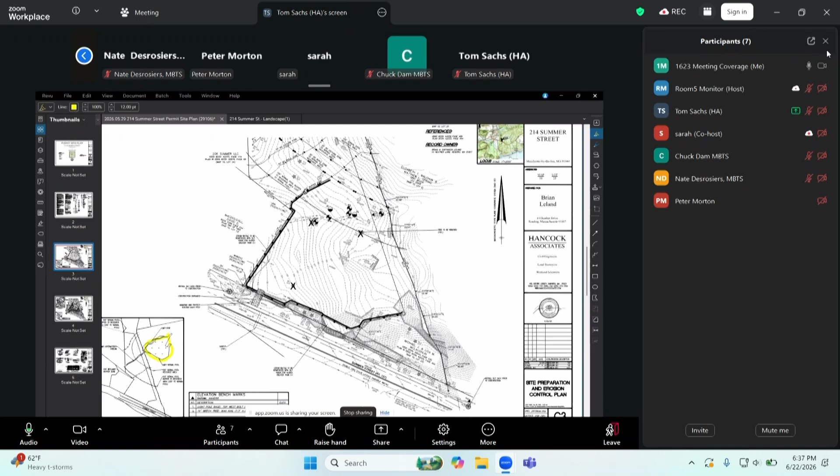Could you point out that 200-foot line? I don't think your pointer was... try to speed it up, show it. If it goes blank, let me know. There we go. Oh, there you go. So our 200-foot vernal pool buffer... I don't think your cursor is showing, oh we yeah, see it. It's like a delay.

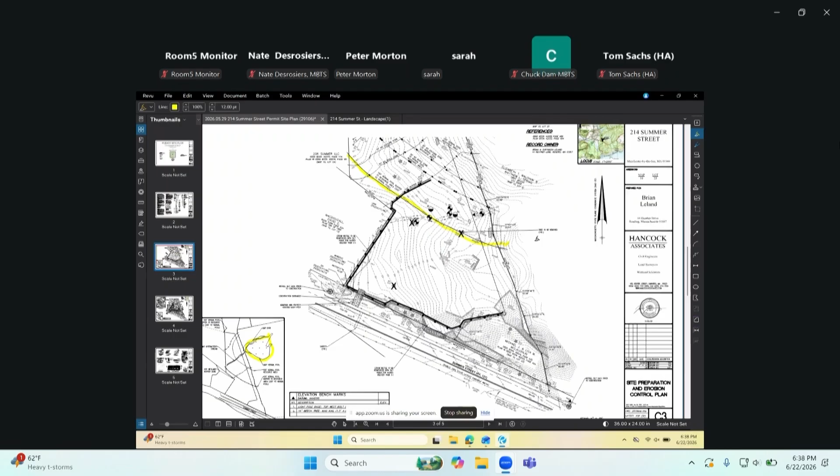So as I mentioned, we did build our site around the septic area. The septic area did require fill, so we do have a retaining wall in the rear of the yard.

Once we had our septic sized and located, we decided to move forward with the site design, which is our driveway. The driveway was designed working with the fire department. They have specific slopes and lengths we need to meet. If we exceed about 150 feet, we need a turnaround. That's why we have this larger driveway at the top, so the truck can pull in and back into that crushed stone area, then go back down the driveway. It's just for emergency access. It's not ideal, but we do need fire department access to the site.

Other improvements we're proposing are permeable pavers at the parking court. We weren't able to do permeable pavers down the driveway because of the steepness, you can't exceed 5%.

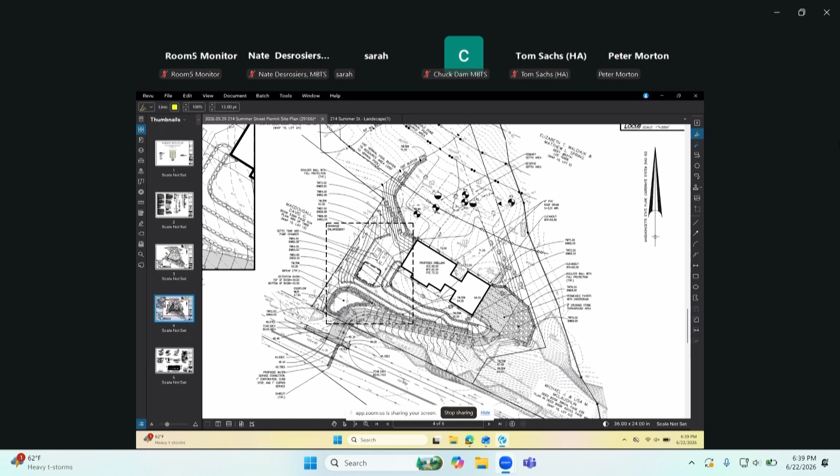For the dwelling itself, all the roof runoff is captured and infiltrated in a subsurface chamber system. I'll get to that in a bit, but that's this little box here. And then we have an enlargement here, so you can see our subsurface chambers adjacent to our septic. This area, we decided it would be best because of the ledge to build up this area. It would allow us to keep material on site, and also allow us to have separation of groundwater so we can meet the Mass Stormwater Handbook standards for 2 feet separation.

Other drainage improvements: because of the ledge, we really weren't figuring we'd get any infiltration at the bottom of the driveway, so we have a small detention pond there. It's not a lot of volume, only about 2 feet deep, nothing crazy. Our goal is to see once we start excavating or removing ledge if this area has soils or not. We can plant it, and our goal is eventually to treat it as a normal detention basin.

Other things along the driveway, we have crushed stone. We are worried about some erosion problems as water pitches into the driveway and into the detention basin. Sometimes those things can get washed away, so we wanted more of that.

Lastly, we are going through the stormwater management permit with the Department of Public Works. We did a drainage study. The hill goes much further past our property, and all of the water drains across our property in the east-west direction, draining into the abutting lot and into Summer Street.

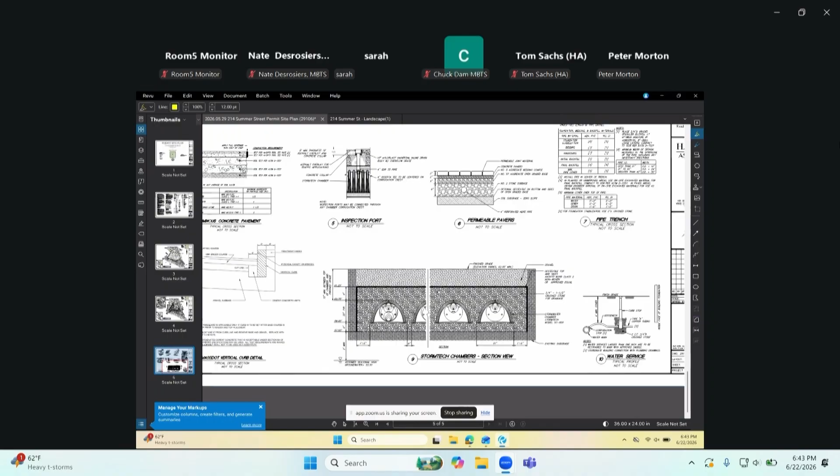And this is just kind of a cross section of the chambers. They're just standard StormTech chambers, plastic, 30 inches tall. Nothing really crazy, it's just there for our recharge purposes. And like I said, all the water off the roof is considered clean, so we're just recharging all the water from the roof right into those chambers.

All right, and you have good soils under those? Yes, well, we're filling up the whole system. The soils that we found when we were there were loamy sands, which is a higher textural class. And then we cross-referenced it with NRCS Web Soil Survey, and it said it was the same. The only concern for us was the ledge, so that's why we're building up this system. We can bring in or move around better material and put it underneath there.

And then I did do a quick little cut fill analysis. Our cut fill, I think, I'm just spitballing, I think it was around 260 cubic yards of cut, which I was a little surprised because I was figuring we were going to be shipping off a lot more material.

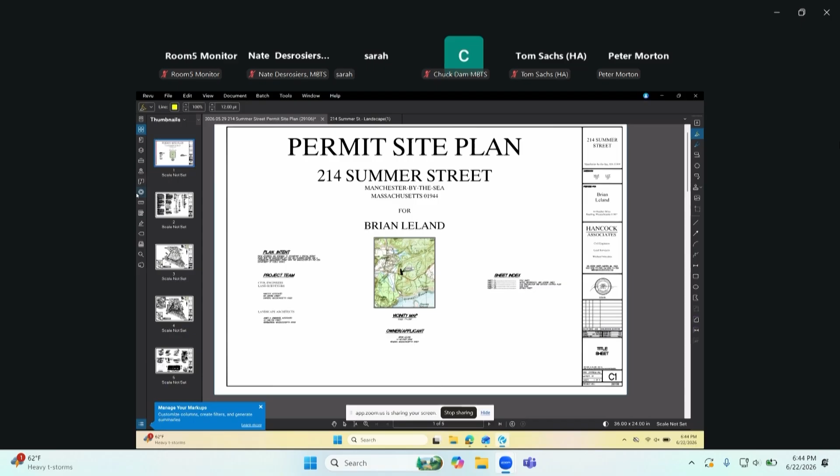And when we discussed the project with the board during our site walk, I forget who it was, I think it was you, you suggested that we do boulder walls, and we think that's a great idea. So we definitely listened to the board with that. We created this tiered boulder wall system, so that will kind of be more aesthetically pleasing from the road. We're using material on site, it's not going anywhere, and it kind of keeps with the look.

Our big concern when we were developing this lot is the board would really want to know how it looks from the street. I've had other projects where that's been a major factor. We find that if we're traveling towards Gloucester, that's your vantage point right into the property. You see right up the driveway, and you see into the detention pond. So those are things that I worked with James at James Emmanuel to provide a landscape plan for. Our goal is to hide those things, because going the other way, you won't see anything, the ledge is all going to be there, it's going to be planted, there's trees there anyway, as there is now. That was kind of our concerns, and that's what we got a lot from our site walk, it was very beneficial to us.

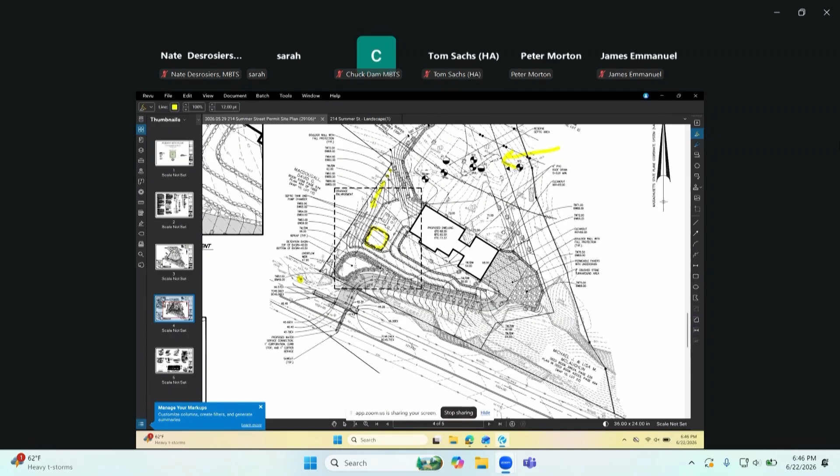Okay, you want to just walk us through the landscape plan?

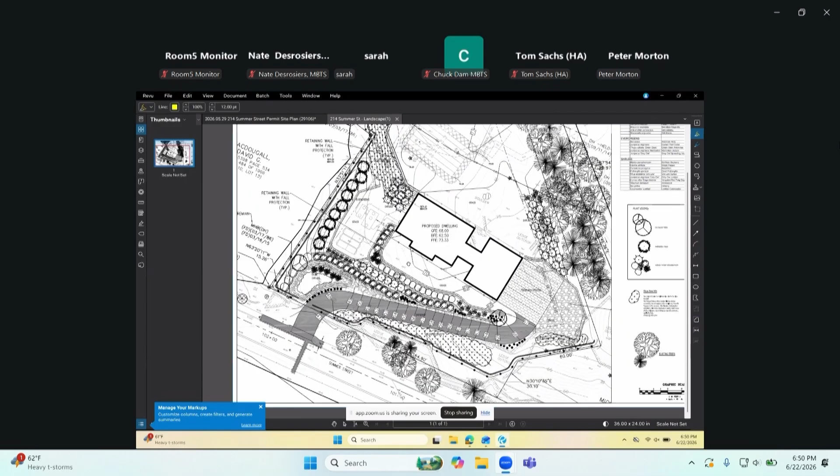When we get to the permeable pavers, you can see in back of that there's a planting bed. We would vegetate that entirety, going around the backyard where the septic leaching field is — that's all cleared out as a flat lawn space associated with the property. But going back downhill, we would revegetate that, and at its steepest point there's a wall, then the same kind of meadow seed mix along with some other shrubs with fibrous root systems that would stabilize that embankment.

So what we really want is to not look at bare slopes in any way. We don't want to see the structure of the terraces, just vegetation — kind of grassy, meadowy hills. We've got a few trees where we can, and we're looking to buffer with evergreens along the adjacent property while maintaining the drainage swales to preserve the grading and stormwater management developed in the civil plan. So that's the landscape plan — I can answer any questions on that.

So I have a question. Can you describe the vegetation that you'd be putting into those ledges going up to the house?

Yeah, so I'm looking at a palette of shrubs that are native, and we've got a mix of things like bayberry, clethra, sweet fern, fothergilla, viburnum, inkberry, red twig dogwood. So it's a pretty good native mix of stuff that's fairly tough, that will spread, and the root growth kind of suckers a little bit too, so they kind of really grab hold.

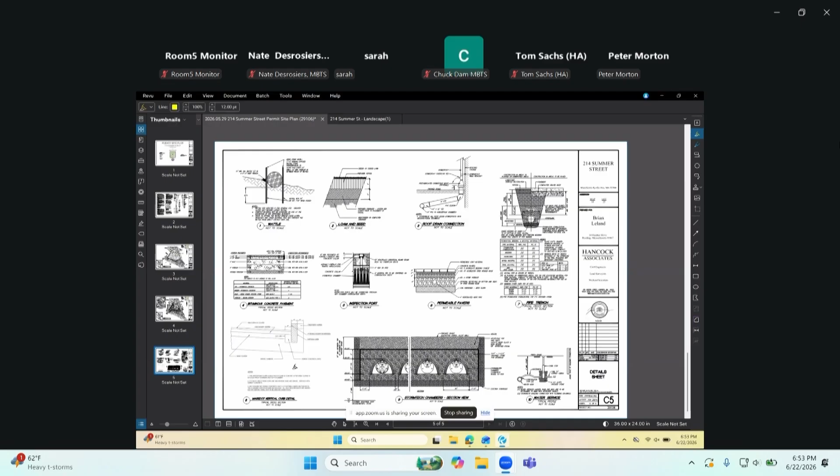So when we do a plan like this, graphically we're showing where the terraces and where the grading is going to be, but in reality the stones have a dimension to them. So maybe zoom in a little bit on that, Tom, if you could, on the terraces there.

We want to just make sure that we're maintaining clearances for places to put plantings, but the plantings are going to kind of intermingle with boulders that have dimension to them. So it may not be 5 feet exactly on one area, but we would nestle a plant next to the boulder so that the boulder would be forward or further back in certain locations, but it won't really look like a segmental wall kind of look.

The more natural you can make it look, the more pleasing, I agree. No, 100%. And the plantings along the neighbor's border, you just show them as evergreens, and your evergreen list includes green giant arborvitae, which is not a native. That's right, that's one of the ones that's not native. That's a western arborvitae. But we do have Manhattan juniper, eastern red cedar, American holly. So we have a few different ones to choose from if we want to.

Sometimes I include that plant just because it's fairly reliable. It's a fast grower and kind of gets the job done. But we certainly could use some of the other plants if we didn't want to use something that isn't native. We looked at a different type of arborvitae, like dark American, which is East Coast native. Some people don't consider it to be Essex County native per se, but it's more native to the East Coast. We could do that as well. The western arborvitae grows a little faster, has a central leader, which makes it a little bit stronger in winter. But either one, I think we'd be open to.

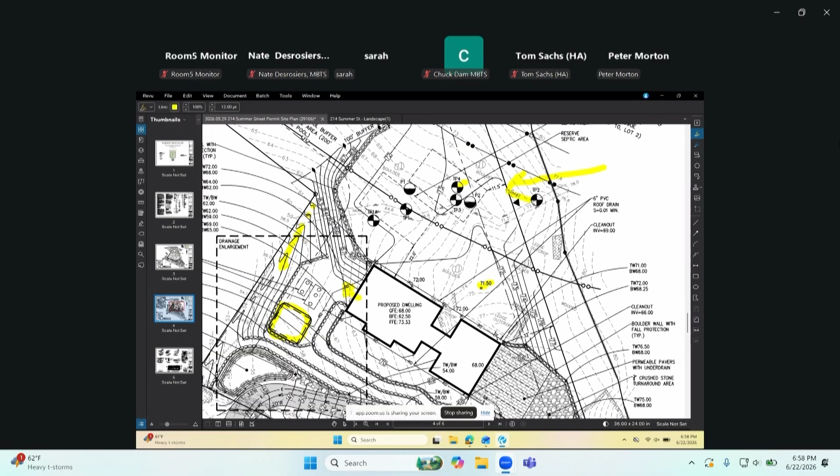away from the neighbor. Can I ask a question too? Yep, of course. Along those lines, in your materials you mentioned many references to the overflow going south to Summer Street - can you just point out exactly where you anticipate that going?

So for us, this would overflow the detention pond, and then it would go down into Summer Street like it normally does. Is that DP1?

That'd be DP1. DP1 is a drainage point - so whenever we do our drainage analysis, we create subcatchments of areas that we kind of manipulate water, and it all drains to one point. That's DP1. In this case, it's the Summer Street drainage, and it's highlighted in our stormwater report.

Some projects have multiple drainage points - that's when you have to take into account water going to both of those points, and you can't send more water one way than there was previously. So this is one case where we just said it's all going to Summer Street. Let's see what we can do to provide a better system for the neighbor, for ourselves. There's an abutter across the street, so that they get plenty of water.

So we want to basically capture everything. We've outdone ourselves with the peak rates - we meet the peak rates, we're doing recharge. So it's basically matching existing conditions, but we're doing a little bit better. We're trying to - our goal is always to improve sites. So this is one of those cases.

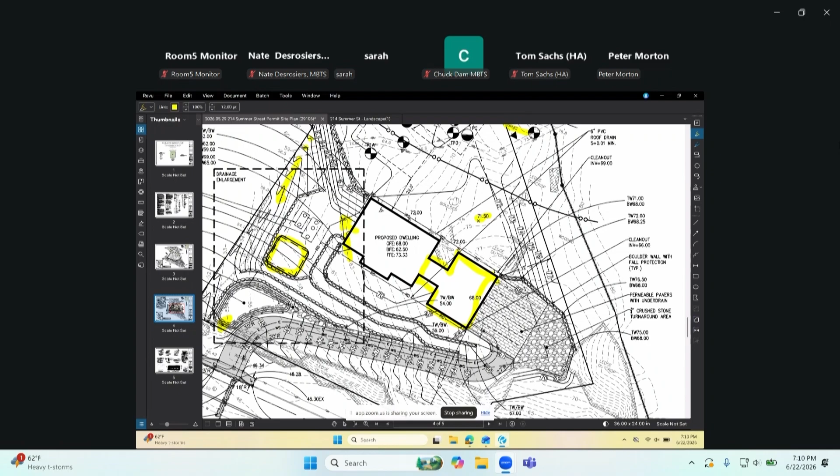Just one comment on that - the house is in an area where cutting would be required. Basement floor elevation 62.5, the 63 contour is right across the front of the house, so we would be cutting into the hillside. I don't remember if the garage - I know it's slab on grade, so this portion here does not have a basement.

I'm simply stating it, not necessarily having an opinion yet. Just curious, when we were on the site walk, you were - I think we're just beginning to really contemplate the ledge and how severe it is, and what means you might have to use to create the environment - even blasting was mentioned. Is that something you know yet, what we're going to have to do? We don't know. Our intention is to hammer first, and if blasting is required, we'd obviously come to the town and request that.

We don't want to, yeah. Although blasting is usually a one-time thing with removal, hammering goes on forever. I believe the town does have set hours, so that's something we would strictly abide to.

Okay, go ahead, John. I have one other question, to the point of how will we know if what you designed is working, when the basin overflows, right? That's sort of when the capacity has been met for the site.

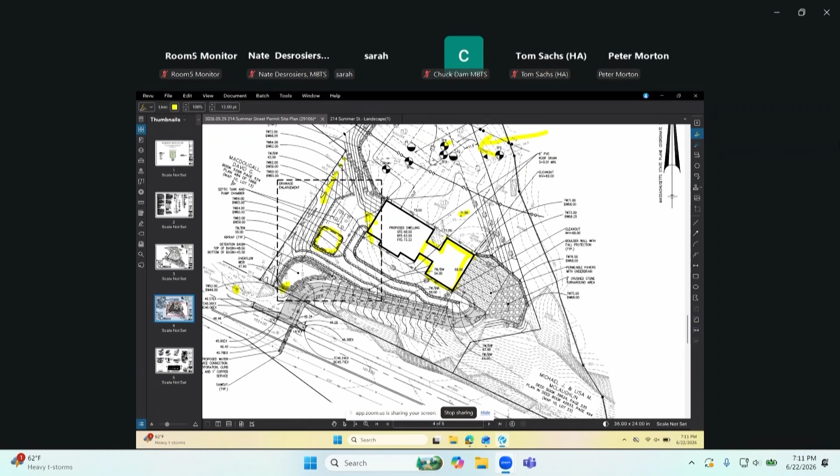Definitely for storms. Does the storm chamber stuff you've got overflow into the catch basin as well? So yeah, that's gonna go down into our drainage swale. I had it on the enlargement. So really that catch basin at the end of the day is where everything's going to end up.

It would disperse, it does kind of pan in two directions. It's metered out of there, I assume. Yeah, out of the tanks. Does it have an overflow though as part of the system?

Yeah, there's an overflow grate in the top. So once you exceed the maximum capacity, it goes up. It's more efficient than if you have like a 6-inch pipe coming out the side of it—you lose a lot of your volume.

And we don't really have anywhere to outfall to. It would be nice to outfall to the detention pond, but that's a lot of volume just going straight to the detention pond, and also that would jump our peak rates. We lost volume, and it's kind of creating a heavy flow into that direction, so we didn't want to overwhelm that.

So the detention pond, worst case scenario—I had a project like this where all the numbers worked great, everything was fine. There was one rainstorm with more inches of rain per hour than ever anticipated, and the bottom of our building flooded. You never want that with a client, but in any case, it's feasible that this could top out and overflow.

So just thinking as a neighbor, let's say it happens, let's say we get worse storms in the future. You could always build up the height of that and increase the capacity of it. Yeah, you could go up. I think the next size up is 45-inch. So if there were serious issues, you could bump the height of the wall.

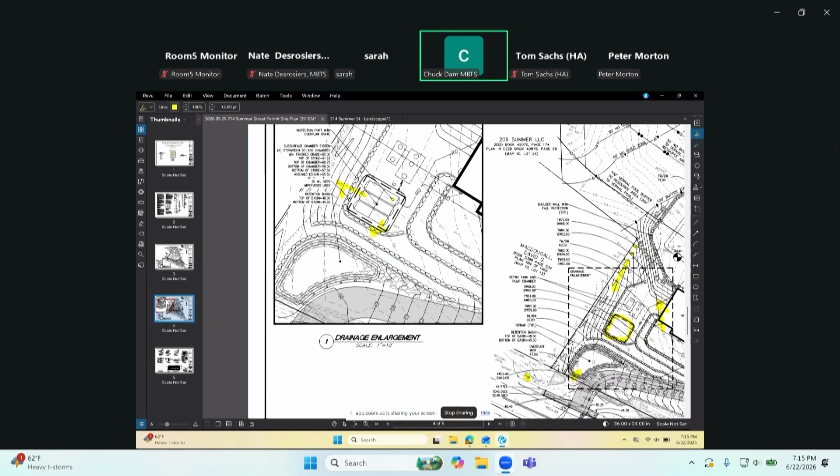Nate, are you still on? Have you guys reviewed this yet? This is Chuck. Hi Chuck, I'm on, I missed the first question. The question was about the stormwater management for this site. Yeah, we're in the middle of reviewing it, but we haven't discussed it at length yet with Tom or the Hancock folks. Okay, great, thank you, so we'll definitely want to hear back from them. Any other comments right now from the board?

We have received a couple of letters. I'm not sure they went to everybody, so if you'll bear with me—I did promise that we would get these read, and some of you may be here. The first is from Matthew and Elizabeth Spring, 216 Summer Street.

I'm writing as an abutter regarding the special permit application for earth removal and filling at 214 Summer Street. I respectfully urge the board to deny the permit on several key grounds. First, the lot is primarily ledge, and any topographic alteration will require substantial blasting and rock removal. The previous developer previously exposed those conditions when clear cutting the land. The subsequent buyer was fully aware of the site's physical constraints at the time of purchase. Granting a permit now would effectively accommodate a known condition rather than preserve the natural topography and neighborhood character that the bylaw is intended to protect. Second, this area contains a complex and historic drainage system.

Previous developments on related lots already increased runoff and erosion, impacting my property and others in the surrounding area. Additional blasting, excavation, and filling activities could further exacerbate these issues. The board's primary responsibility to protect natural resources and prevent adverse impacts to neighboring properties is particularly important in this case.

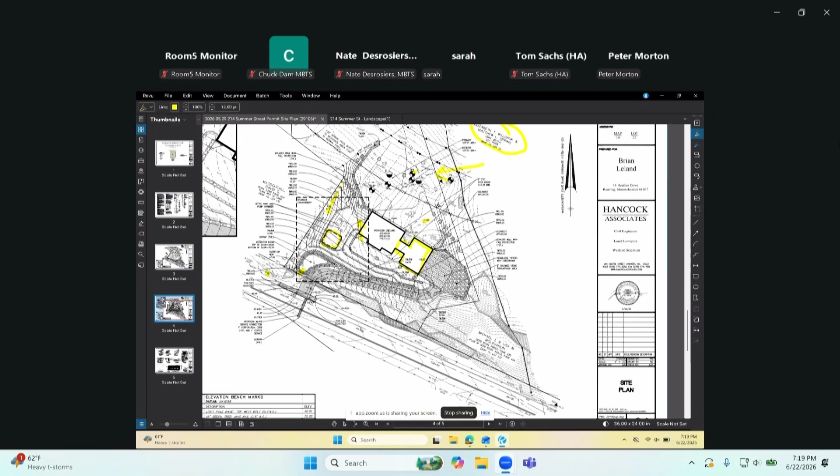Maybe I'll try to summarize this one. It looks like we have similar concerns. The first is drainage, and they've only lived here for 13 years. They're asking us to deny the permit. The first reason is drainage and runoff.

It sits on a ledge below Hickory Plum Hill watershed boundary in an area with a long history of engineered drainage. This includes old terracotta pipes near our home, a historic Olmsted-era drainage scheme, and French drains damaged 60 years ago that still shape the flow today. Given how fragile and poorly understood the system already is, we're concerned that blasting and further earth removal could unpredictably disrupt it.

The existing storm drains on either side of 214 Summer Street already feed a wetland buffer zone covering nearly our entire property. We've already spent significant time and money mitigating flooding from past developments and don't believe the system can absorb more. The developer has made no effort to understand this drainage history or engage with the abutters about it, raising our concerns about whether the application meets the bylaw's purpose.

Secondly, safety. Over the past 2 years, the developer has repeatedly parked on public sidewalks, operated heavy equipment directly above the sidewalk on 128 without a spotter, and obstructed traffic without police detail. We witnessed a falling tree branch from this equipment nearly strike a bicyclist, and we've contacted MassDOT multiple times about safety issues here, and MassDOT has reached out to the developer regarding the same concerns. This is not an isolated incident.

For comparison, the work at 208 Summer Street, a similar ledge wetland lot, was set back from 128 via a curb and longer driveway, keeping equipment away from the traffic and the abutters. We see no comparable setback here, and the board is already familiar with how dramatically that land was reshaped and how much more extensive the work proved to be than anyone anticipated. That's at 208 Summer Street.

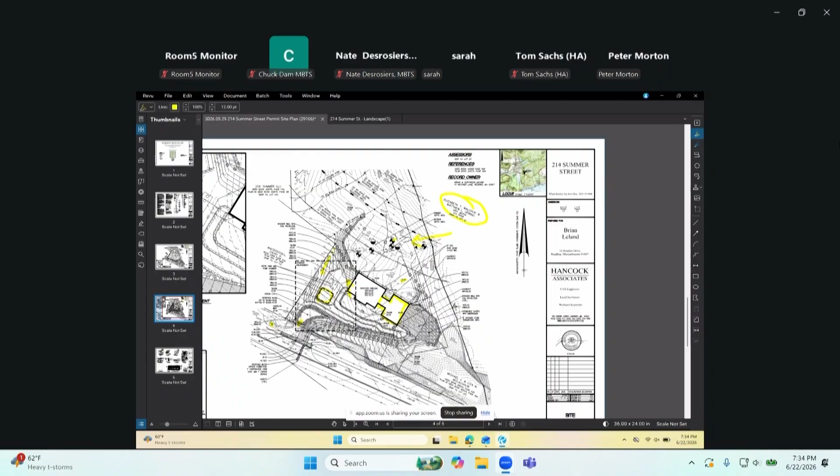Ted Snyder, 225 Summer, read our letter. But just to reiterate, I think with the water, if there is a single point where water is going onto Summer Street, if you drove on Summer Street last night during the rain, or probably right now, you'll notice the water ponds up just below, on the lower right of the graphic. Is there any way to tie into the storm drains directly? We have concerns about having even more water going to Summer Street. It's caused issues for us and for Tom.

Can you just point, sorry, where you're concerned? Don't touch the screen, it will mess up the screen. We're here, here's your driveway I think. The water tends to pond at this low point.

There's a storm drain right around here in the Spring's driveway. Next to the Springs driveway, there's a lot of water that comes down there, and then the water goes this direction on Summer Street. So there's a storm drain there. And the catch basin that you're going to tie into, Tom, is right where? Here, so it's going to catch the swale, I'd assume, going to the western abutter.

The road slopes this way, but the water flows the other way. There must be a crest somewhere around here, because the crest is on the right side, and the bottom flows right of the screen. It peaks right here, and the drainage off this lot goes back to the left toward the railroad tracks and the wetland down below. It looks like the high point's actually in the far left-hand corner, so it must crest and then it does crest and creates a little bit of pooling.

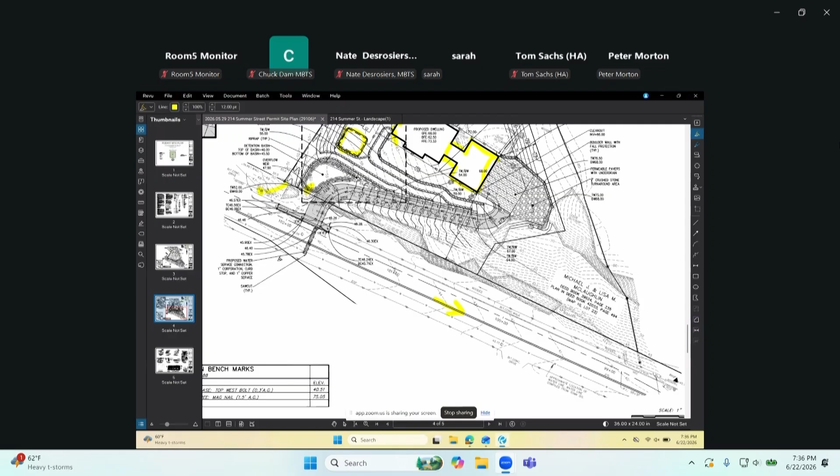So I think, Mark, we can't make the existing drainage puddling on Summer Street go anywhere.

Except to make sure that the stormwater plan is sufficient to not increase runoff on Summer Street. And I would love to tie into a DOT catch basin, but like I said, the first question they asked was, you're not tying into our catch basin, are you? So they don't like that, because they have their own sizing calcs and their own system size, so it predominantly has to stay on site.

Their catch basin is on the other side. But we're not adding flow to it, we're not adding more flow, I suppose you're adding less flow. You can kind of see with the existing condition, the grading just wants to go this way into their property, which, you know, we've heard their voice on that and they've said they've had a lot of water issues, so it was definitely a critical part of our design.

Okay, and just to be clear, the design now is proposing a swale between the MacDougall property and this property that we hope will intercept and deal with both the overflow from those basins, because it's gonna essentially create a dam, and because everything is at sort of the low point from everything up the hill, at least the water coming off of 214 will not be worse. As you can see, here's a high point at the top of the hill, there's two peaks, one here and up here. So those two peaks, water from there, because I did a drainage study for this and it was submitted, or LiDAR was, and it just flows down into that property.

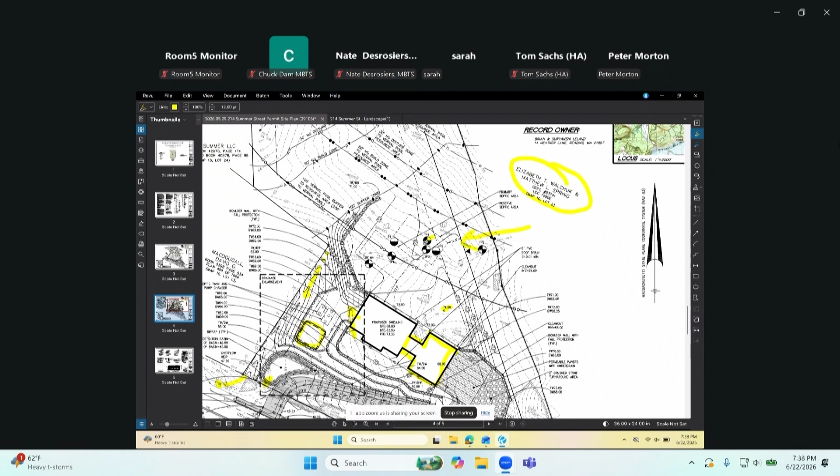Now, in torrential downpours, if you're seeing flooding there, our systems do bubble up when they fill with water, but we're holding back that volume. Our systems aren't blowing out of the water according to our models. They're holding water a good amount, and like the detention pond at the bottom, it's a broad crested weir, so the water kind of just topples over slowly versus creating a single discharge point and washing out.

Is it like a rain garden or something that you're doing? Yeah, it kind of utilizes a rain garden. Because we have rain gardens on our property and we're very familiar with drainage technology.

And I'm sorry, what's your name? Emily Snyder, 225 Summer Street.

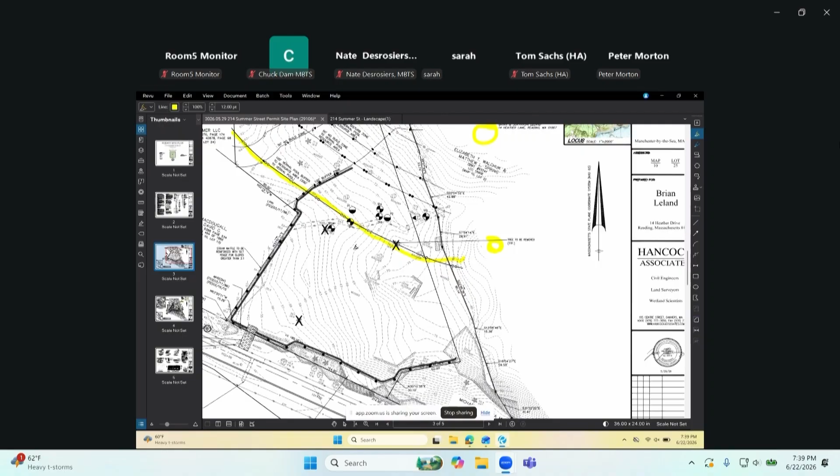Just a few additional questions. I know we're looking at pre-construction, post-construction net, but we're also concerned about what's gonna unfold in between that delta. And what is the stormwater mitigation for that? What does that look like? Because I looked through the 100 pages and it's still very confusing to me. If you could elaborate on that a little bit more and what calculations, because, you know, we do have some intel living in this community, and that DP1 or that catch basin does flow to the wetland and it overflows. It can't absorb. I don't know if the DPW needs to do another study, but we're just concerned that if that's not cleared off by the contractor consistently, it's not gonna work.

So, one of the big requirements for the stormwater management permit is providing an erosion control plan. So this is kind of what you see here, where we wrap the lower part of the site. So all the water flowing through is gonna have to go through straw wattle and silt fence. That's gonna prevent any type of sediment going into the property. We're also proposing a construction entrance, so once we get our curb cut, we can get the sediment off the wheels of the trucks, and that will take care of that regarding calculations for while the site is being developed.

We haven't done any type of calculation for that. We do suggest doing loam and seed in areas that are not being disturbed or worked on, to cut down on sediment. Loam and seed is really good - when you get grass, it gives a lower curve number, and the water isn't going to run down the site as much as it originally did. So it'd be good to get some grass there anyway, I agree.

I don't know if you've got access to our stormwater report. We have a section where we list out the steps that need to be taken - it should be in here. These are the steps we provide: basically setting up your erosion controls, your straw wattle, your silt fence, giving the contractor a step-by-step. We also show checking silt sacks and catch basins on the street, because if those fill up, that would cause overflow onto the property.

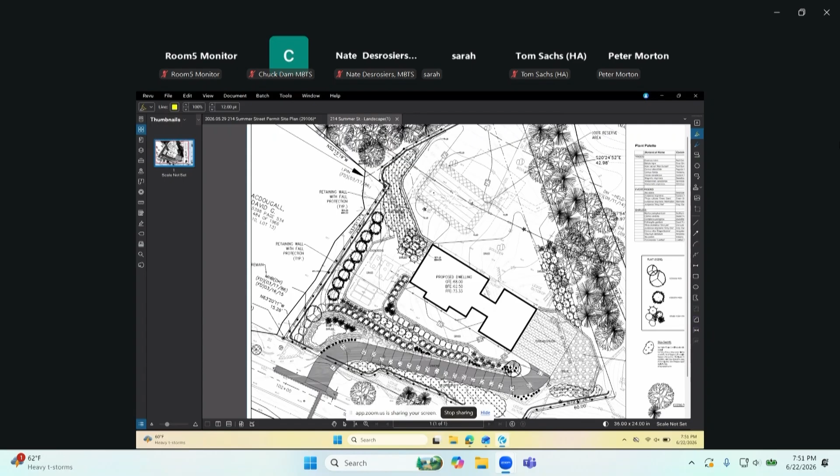Up here on the right, on the left side of our house is a knoll. Years ago, when they built the house down below, they didn't have electricity, so they had to put floating pipes in to divert the water away. We moved here in 1955, and there were never any problems with water.

Until a gentleman named John Karras bought the property at 216, I think. There used to be a small little pond or whatever, and they dug it out. This was prior to the restrictions, which I was told there's nothing we could do about it.

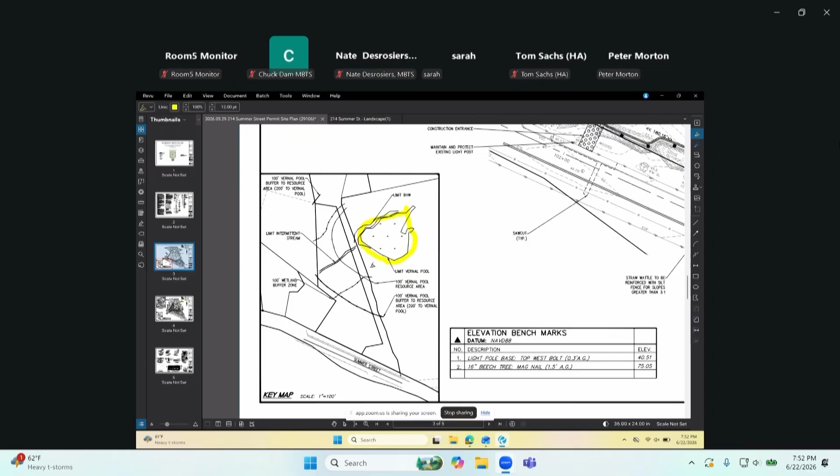And they took all the soil and they filled a quarter of that knoll above our house. Is that the hill, the vernal pool now? And now the water has no place to go. It just pours down on that. Oh, did I confuse you, sorry?

Yeah, I think our house is here. Yes, it just pours right down here. So what we had to do is we had to dig a trench to divert the water. This is all solid ledge, all solid ledge, right? And this topsoil was taken off, which makes it worse. The water just pours down.

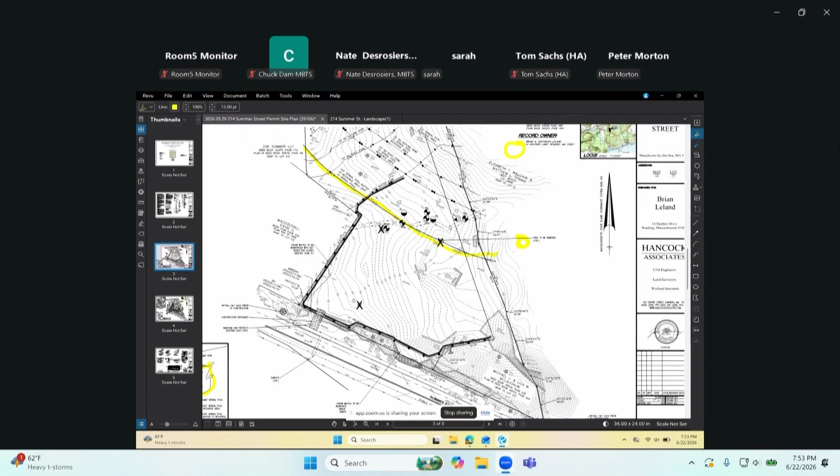We lost 2 furnaces and 3 hot water heaters over a number of years. And when I approached the contractor, I was told don't worry about it, we'll take care of it. Well, I do worry about it, because it's all solid ledge.

And you say, well, we have this technology, we can do this, we can plan this. You can't—I mean, you can, on paper it looks like you can divert the water, but you don't know. It's solid ledge, the whole thing. This area over here is a mole, a lowland area, and the water just pours right down there.

And when I approached people from your company, it perks, it's okay. Well, I'm not willing to take that chance because I don't want to put more money into the property. And if you just stop to think about it for a second, the whole area is solid ledge. And when you take the topsoil off, the water that comes down is going to increase.

And these people that live across the street, they've had a lot of issues with their property as a result of water coming down. You could say, this is what we have in mind, this is what we're going to do, but you don't really know that. When you take the topsoil off and you have all that ledge, the water's going to work its way out, the easiest point of least resistance. That's what I wanted to bring up, thank you very much for your consideration.

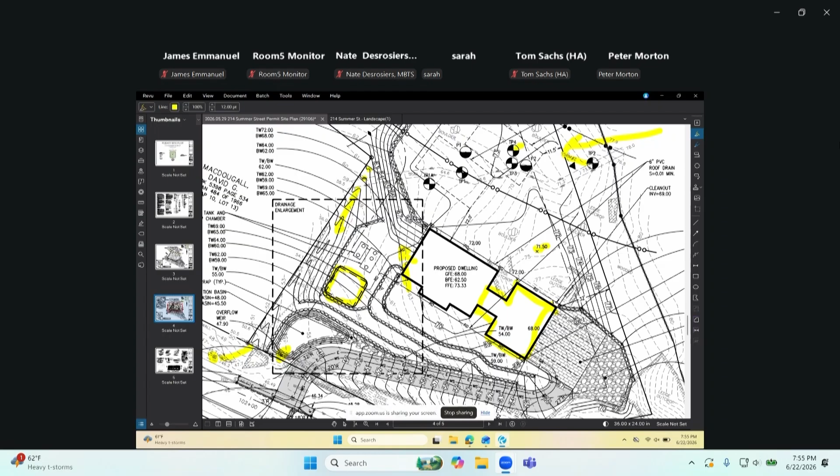I think one of the challenges for us is that we are limited in what our tools are to the construction plan. Unfortunately, I don't think we can say no to the house—we just can't, unfortunately. I think that would be an appeal we would lose, unfortunately. That would not be in the town's interest, but we will, in following up from Mr. MacDougall, address it.

You have the perk sites, and you have a very steep slope away from them at the corner of his property? Is that disturbed, or are you touching that at all? That's filling right here, this is fill. So you're making a grade toward his property there—can that swale be extended up higher? That's a 2-to-1 slope, so that would be very difficult without—you'd have to make the wall higher.

What I see is yes, water diverts in this direction, and there is already water going towards his house. We're just trying to intercept it, have it go around the garage, and then we're also trying to capture it in the swale. So yeah, water's still going to Mr. MacDougall's house, but I'd say a substantial amount of water is being deviated away from it.

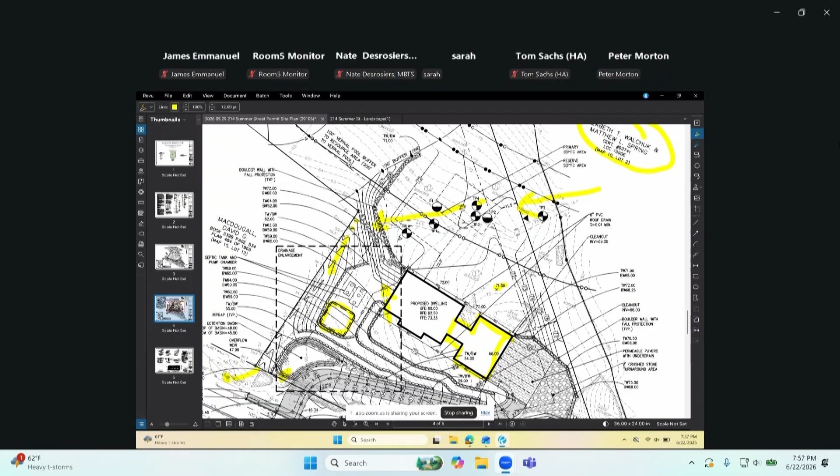So what Mr. MacDougall just described is that water historically has entered his property above the berm you're building. He said it started when work was done at 216 Summer Street. But you're not doing anything to mitigate that flow, you're just hoping, because you can't due to the slope up there. Water running down this hill would come that way, but we're also pitching water away from it. None of this water is going to the right of the garage currently.

I wish I had my stormwater model because you could see where I pulled the LiDAR, all this water comes down. Could you pull up the existing drawing, the EX sheet? Existing conditions, yeah. Oh, so you do have it, you can see it really clearly on that. I don't have it, let me see if I can stop sharing.

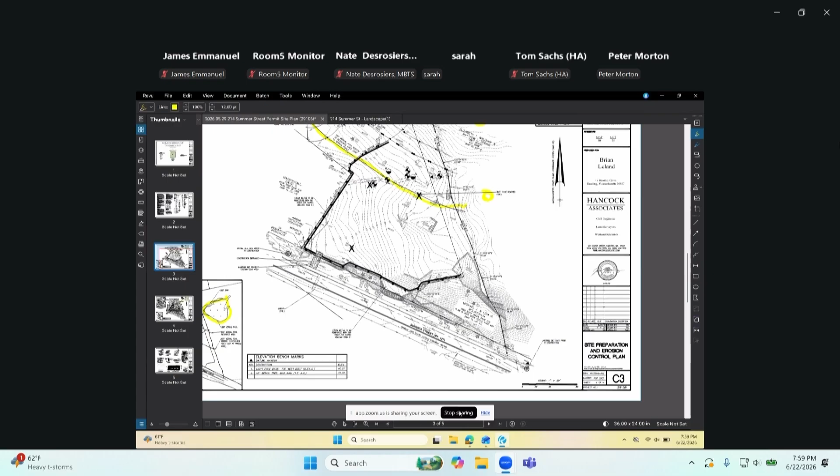There's a trail that goes up through the woods there. Yes, you can walk to the vernal pool. Is that basically where the water flows? It looks like it's based on the topography, it's a river or stream or something. If you look at that, here's the peak, one peak, here's the second peak, and this runs right through. It's almost like it could be the bed of the stream. Probably, however, the grading is significantly different now.

What's interesting is there's a trail coming down, and it's now ending in this. So I wonder if there's a way, drainage-wise, whatever you're capturing, to capture it at this point and send it down through the systems. Okay, so I think we have some things that need to be hammered out still.

One other thing I wanted to point out from the comments I read is the question of safety on the road. That would be between parties, that's not our jurisdiction. So if you have questions about the road being blocked, that's a police matter.

Let me ask the contractor, do you anticipate being able to store all your vehicles and material on the site and not block the road, or is there going to be a frequent need for a detail? It shouldn't be a frequent need. We have access to the property now enough to get small vehicles up. As soon as we're able to get started, the first process will be to get the driveway cut in and get everything off the street.